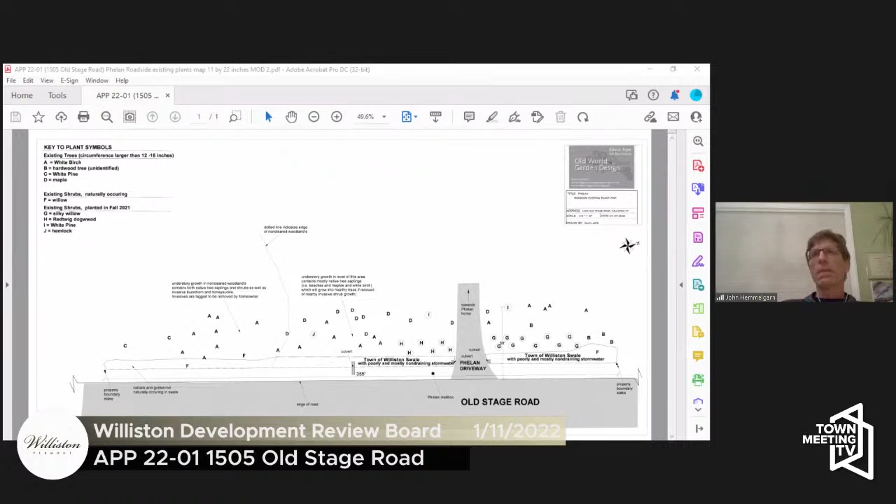And so the meeting with staff, so who is that? Well, given the fact that Matt originally ruled and the DRB overturned his opinion, I would recommend that you go to Emily. I think it needs to be- oh, I saw Melinda raise her hand. Oh, okay, no problem. Melinda, you're the person. Thank you for that, John. So go see Melinda, set up a time, have a conversation about what the regulations declare for a buffer.

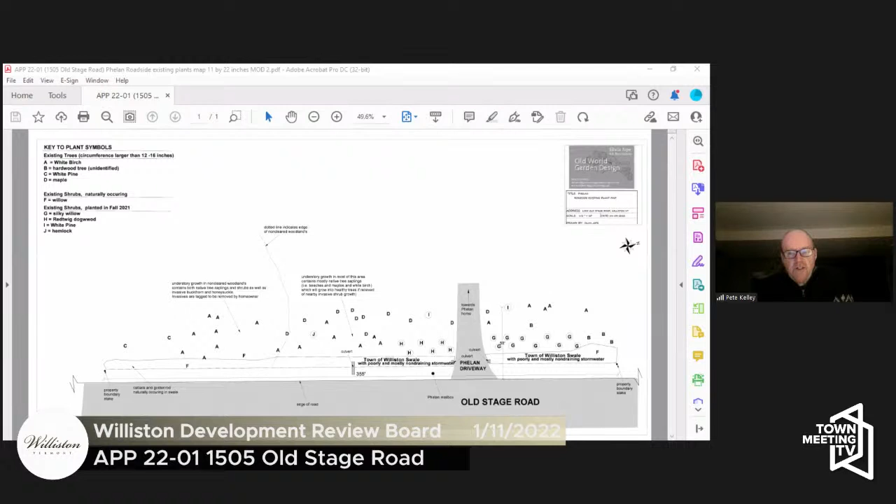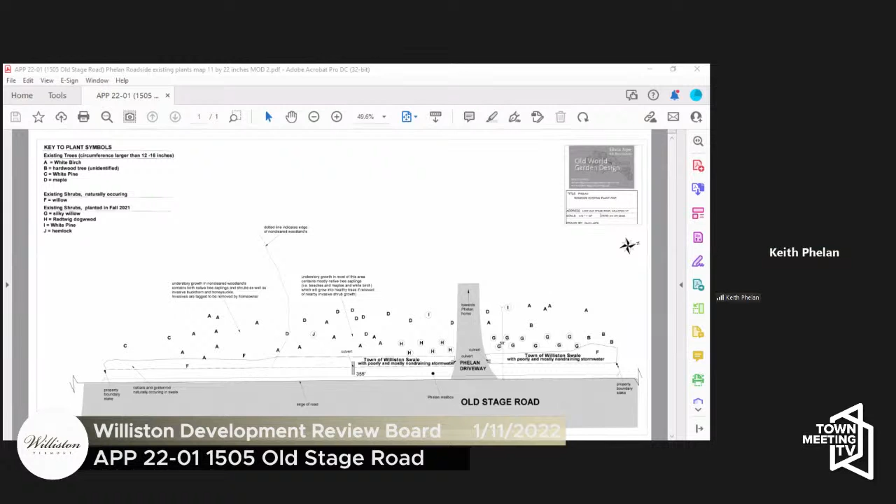I would recommend that you do it with Melinda, have that conversation, engage in that conversation with her. I think it will be fruitful. Okay, all right, sounds good, thank you. And thank you for accelerating me up to the front, appreciate it. Oh, not a worry. Thank you.

Okay, going back to the agenda.

Two items in the public hearing portion: DP 22-04 Chittenden Solid Waste District and DP 21-20 Taft Corners Associates.

First up is DP 22-04. Who is here representing that application?

Josh Tyler, Chittenden Solid Waste District, Director of Operations. I'm joined by Tim Shea of the Chittenden Solid Waste District, Associate Director of Operations, and Doug Goulette, our Consulting Engineer.

Great, welcome all. As disclosure, Doug Goulette and I are neighbors in the same Williston subdivision. I do not see that as a conflict of interest.

Okay, first up is staff. Melinda: the Chittenden Solid Waste District would request pre-application review of a proposed 10,000 square foot administrative building with parking and other appurtenances located at 694 Redmond Road in the Industrial Zoning District East. The new administrative building would replace the CSWD's existing facility located at 1021 Redmond Road.

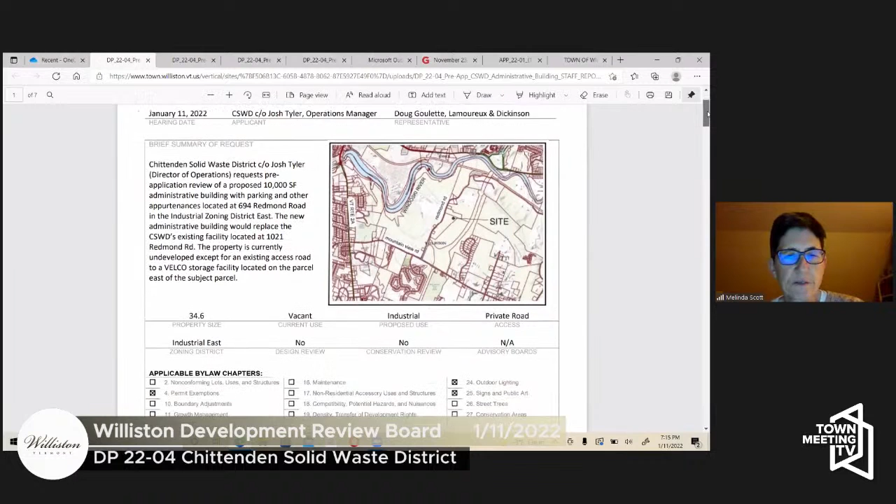Staff is recommending the DRB recommend the proposed project proceed to discretionary permit with recommendations as drafted. This is the first time the DRB is reviewing this request. In 2001, the DRB approved SUB 0110, which created the subject parcel. Advisory boards did not review the proposed project.

The Public Works Department reviewed the proposed project and... Melinda, can I interrupt you for one second? Just as a point of clarity, I apologize. You said that this hearing was a discretionary permit. It's a pre-app, isn't it? It is a pre-application, sorry, yes. Okay, yeah, all right. Thank you, I apologize. No, just want to make sure it's clear.

Okay, so the Public Works Department did review the site plan and provided comments in a memo dated December 17th, 2021. Their comments are included. We received one comment letter at the time of the mail out from Geraldine and Leyland Carpenter, and you also received that comment letter with your packet.

So the dimensional standards in the Industrial Zoning District East: the maximum height is 36 feet. Minimum setback from any road is 50 feet. The rear and side property line setbacks are controlled by the landscaping requirements of Chapter 23. There is a requirement that the lot have at least 40 feet of road frontage on an existing public or private road. Compliance with height and setback standards are expected.

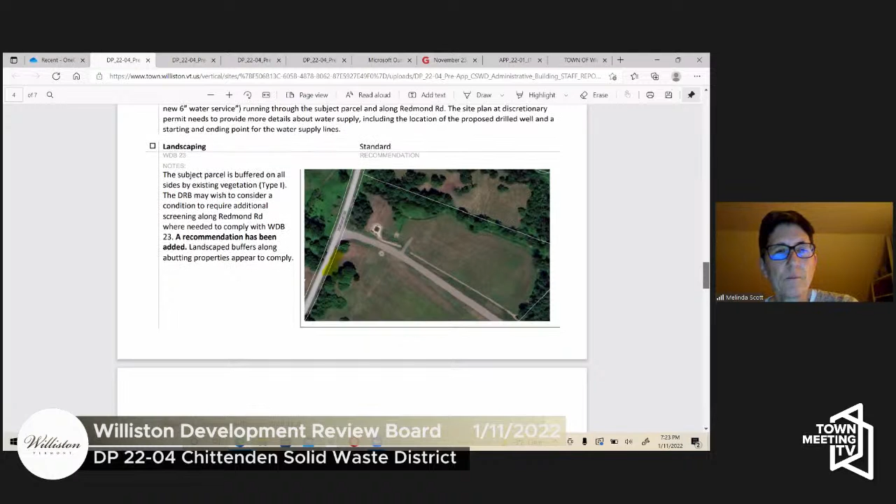Based on some communication via email that we've had with the Department of Public Works, it's my understanding that CSWD is applying to have water service extended to that parcel and is working with the Department of Public Works on that. A state permit will be required for the extension of any public water supply, but it's not really applicable to the Williston Development Bylaw.

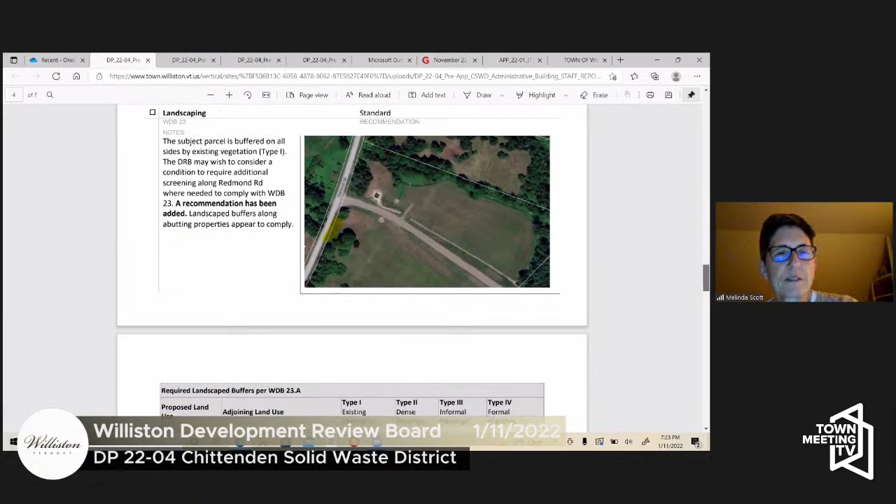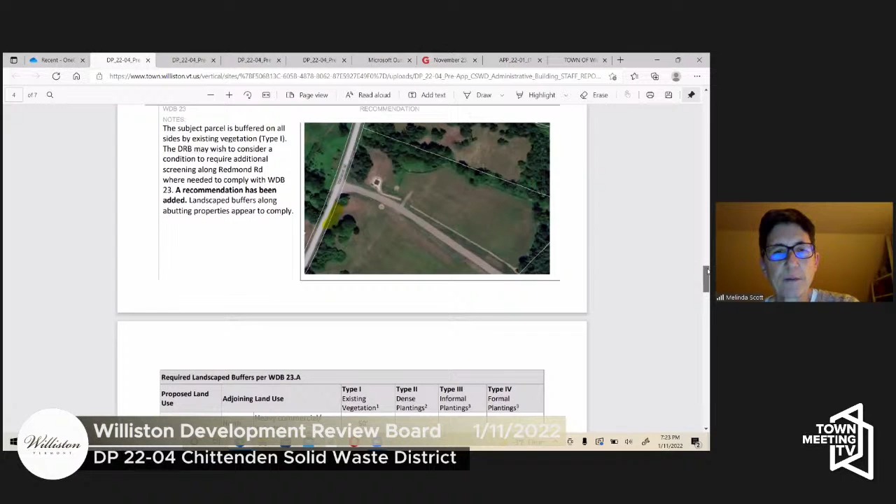For landscaping, the subject parcel is buffered on all sides by existing vegetation, a type 1 buffer. The DRB may wish to consider a condition to require additional screening along Redmond Road where needed to comply with WDB 23. A recommendation has been added. The landscape buffers along the abutting properties appear to comply.

For street trees, WDB 26 requires street trees for many development or redevelopment projects. Street tree plantings can be considered a type 4 buffer and therefore fulfill a portion of a development's overall landscaping requirements. Because the frontage along Redmond Road is buffered by existing vegetation, staff doesn't think that requiring street trees is necessary or appropriate.

There are no mapped watershed protection buffers on the subject parcel except for a small Class 2 wetland on the northwest corner of the property, which will be protected with a 50-foot buffer as required by state law and the Williston bylaw.

WDB 29.961 requires all watershed protection buffers to remain unmown and in natural native vegetation. To ensure the watershed protection buffer is not disturbed, WDB 29.97 requires the buffer to be marked on the final plans and demarcated on the ground by plantings, a fence, or preferably a line of boulders.

The site plan shows an existing stormwater feature east of Redmond Road and north of the access drive that receives runoff from a swale running alongside and parallel to the access drive. The site plan also shows a possible location of stormwater practice for runoff from new impervious surfaces.

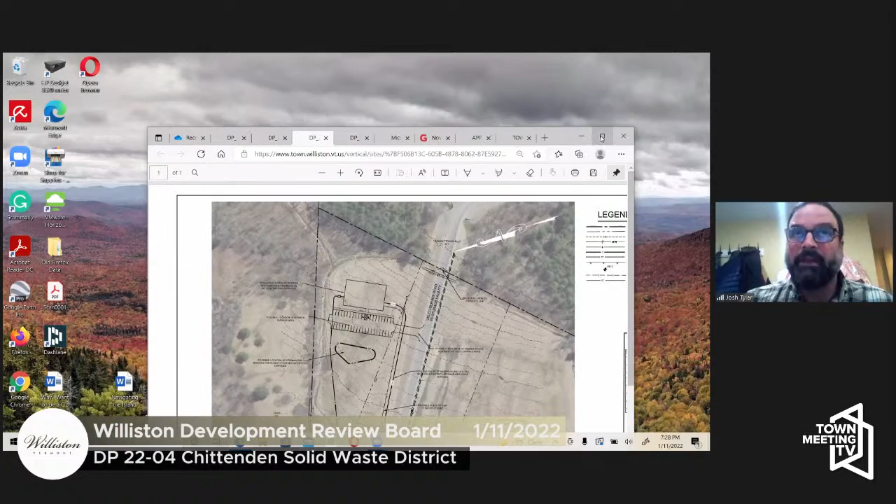I'm curious how you came up with 41 spaces, or what a typical day would look like for this building. It ranges. We do hold safety committee meetings, an internal committee, that bring upwards of 12 extra people onto the site. We roughly have 25 full-time employees at our existing facility, I think it's 24 at this point, with three positions to fill. We also hold workshops sometimes.

The idea with those would most likely be after hours, but there are times when we have meetings and bring people in. We are considering using this as our exec board meeting space as well. We do use the town of Williston for our full board. I don't think we're going to get enough room into it to go away from that, but we'll see, kind of when our architects roll their sleeves up.

But yeah, that was the idea, just not to undersupply the amount of parking. We've hit as much as 30 to 35 people, and we've had to park over at our compost facility in the past to do that. So that was kind of, we tried to get as many in as we could. Thank you. Yep.

David, it was basically an oversight that I failed to look at the new regulations and the new parking table, so I would have maybe commented on that before showing the 41. But as Josh said, we definitely will provide some EV parking and carpool parking to get the numbers down a bit to be within the range of the current bylaw.

Okay, having said that, now that the plan's up, I'll give a quick overview. What's shown for the building is 10,000 square feet. Once an architect gets more involved, I'm sure that footprint will change somewhat, but that's sort of the general placeholder on the general location of the site.

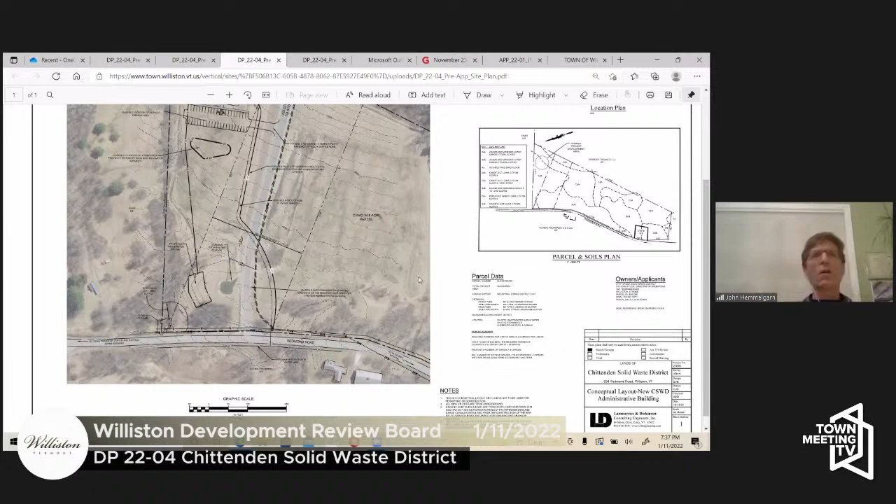Okay, so when you say there's an existing buffer, you're talking about what's all along the road, along Redmond Road, not along the Velco easement drive, as I assume that's a driveway that's running along inside your property. Is that right? So there's no screening required there. Right. The screening or the buffers only pertain to the perimeter property lines, which are fairly heavily vegetated right now. Right, and I think we can see that.

I mean, the one exception on the what is that? The north, on the left there. Is that actually, that says CSWD, doesn't it? Right there, as the neighboring property owner. That's correct. Okay, but it's a different parcel owned by your client. Correct. Okay, Melinda, does that require buffering between two parcels owned by the same entity? So our bylaw treats abutting parcels, even if they're physically separated by boundary, but if they're owned by the same entity, they're treated as one parcel. Okay, so that entire north parcel is essentially the buffer.

So, okay, all right, that helps a lot in understanding the buffering conversation. And I guess, Simon, maybe you can circle and make sure I'm understanding the buffer along the road. Is that copse of trees there, just or would that be west of the septic field? Yeah, right there. Yeah, it's a pretty dense thicket.

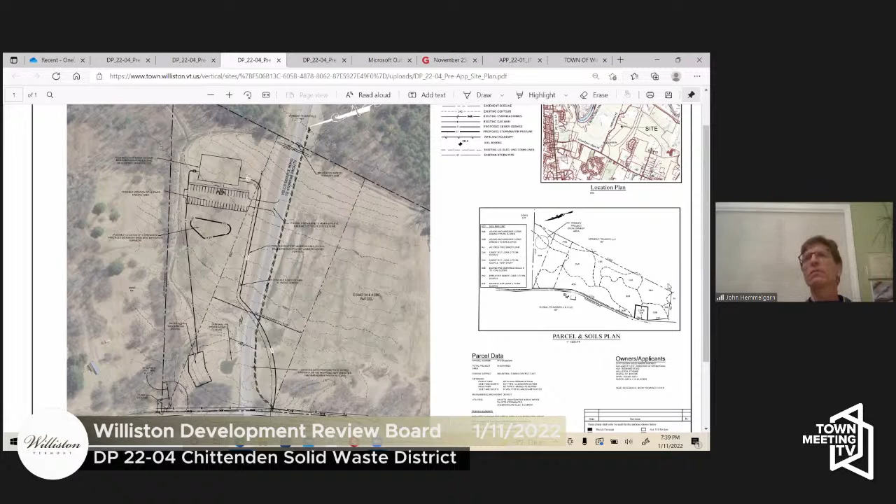It seems, just commenting out loud to the rest of the board, it seems crazy to tear those down to put in street trees along a road that doesn't really fit with the idea of street trees very well. I think I would chime in here and argue that this is set so far back from the road with lots of perimeter buffering that I don't think there's a heck of a lot needed here. To me, at this point, it's an esoteric discussion.

Right, exactly. Yeah, and I agree with John's point, is that for the character of the area, street trees would look odd. They would look pretty cool if you did them all along the Velco driveway, but that's not part of this conversation. Yeah, that actually could look cool, but we're not into cool here. But that's not something it's within our purview here to ask for either.

Pete, that's all. Those are all the comments I had today. Okay, any other members of the DRB, comments please?

Yeah, one comment. I'd like you to consider looking at the porous parking. We need one of you guys to step up and actually build some of that because I believe in it.

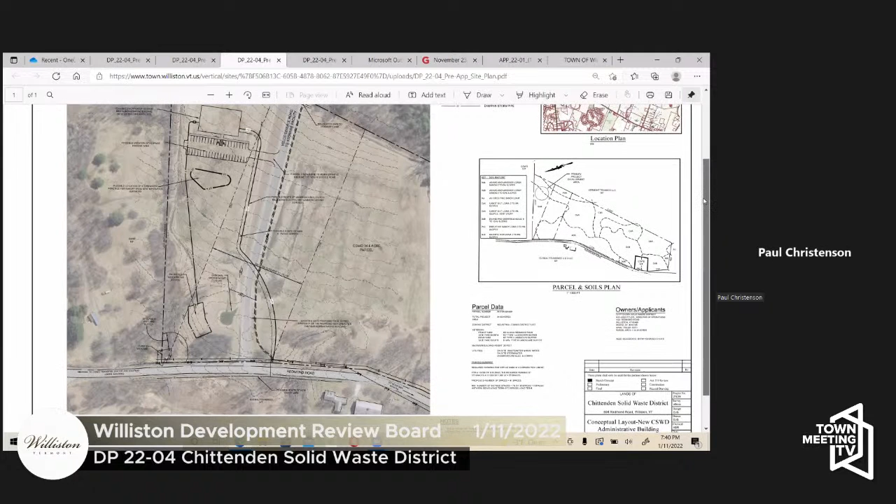Well, how about this, we'll take a look. I'm a believer in it as well, so we'll see what it looks like. Doug and I will put our heads together. How's that sound? Like I said, don't just immediately pull back from 41. We could have 41, just make sure some of it's porous because I think it'd be a nice demonstration project so other companies could say, oh yeah, you can actually do it.

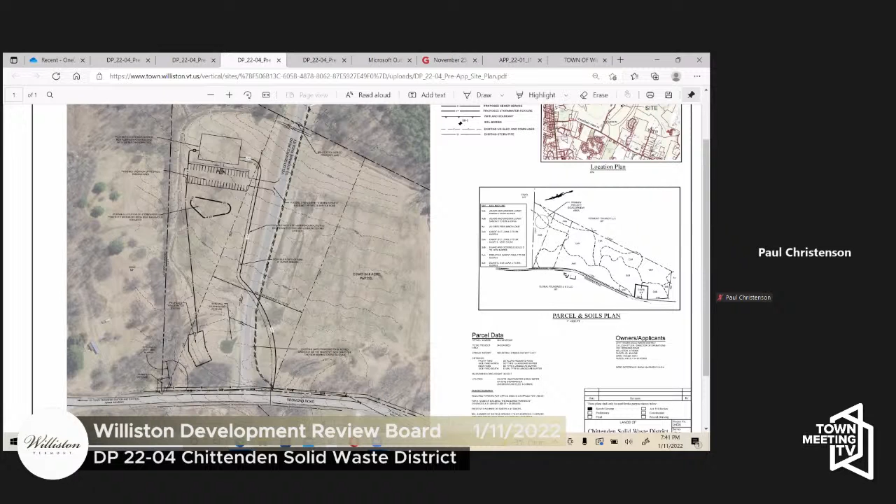And we are in control of our own sanding and salting, so we could regulate that pretty well.

I just had a quick question on the site, not necessarily the site plan itself, but just looking at the aerial, I guess just east of that existing teardrop stormwater feature, it looks like there's a driveway that's perpendicular to the road where the stone ditch kind of goes underneath?

Yes, David, it's a little gravel service road, probably built when they built the stormwater pond. Okay, so that was just to get access across that ditch. Yep, it doesn't go anywhere. That's where I always just park when I go to the site. It's big enough for a single vehicle to pull out and park. Okay, I couldn't quite tell from the ortho what it was.

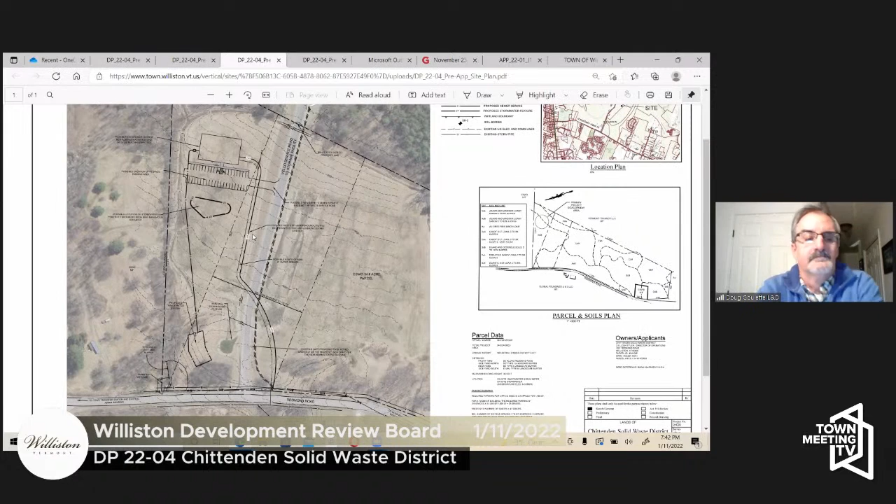Any other questions? Okay, members of the public, any questions? Anybody out there that has a question for the DRB, questions pertaining to this application, please raise your Zoom hand.

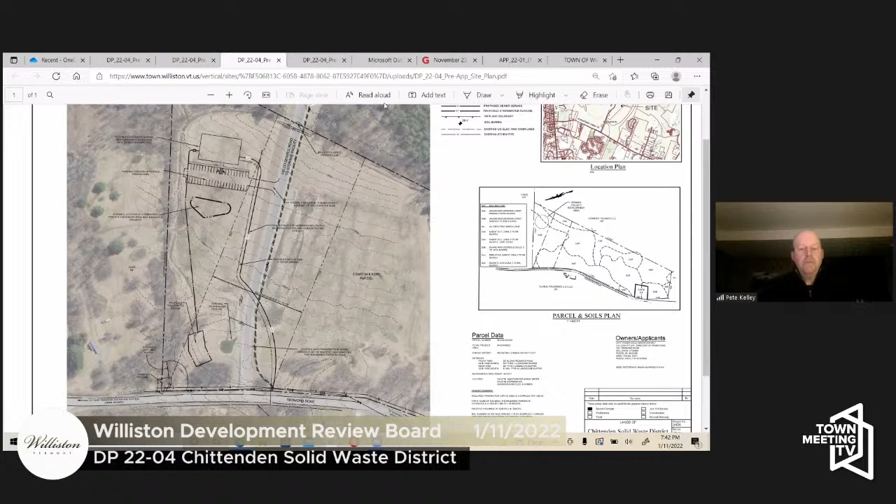I'm not seeing any raised hands on Zoom, so I don't think anyone's got any questions. Okay, thank you, Simon. Okay, last chance for questions from the DRB.

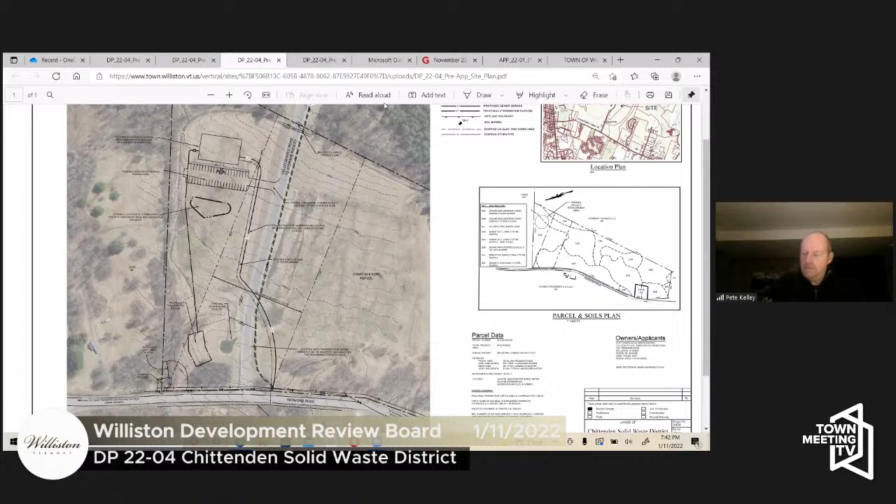Any wrap-up comments by the applicant? Thank you for having us and thank you for your time. All right, thank you.

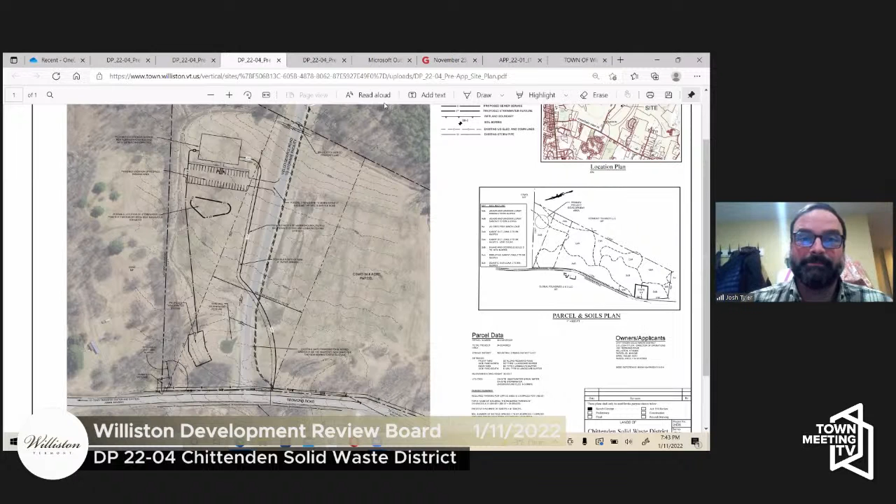Okay, next up is DP 21-20, Taft Corners Associates, care of JL Davis.

I'm going to recuse myself from this hearing. The reason is my employer, DEW, does work with JL Davis, and so I have an inherent conflict of interest on this application. So I'm going to turn it over to Mr. Hemmelgarn to head this up, and I will be a member of the audience for this application.

Thank you, Pete. So at this time, I would ask, Pete, did you actually open that hearing, or is that something I should do here first? All right, let's just open this hearing at 7:44, whether we need to or not.

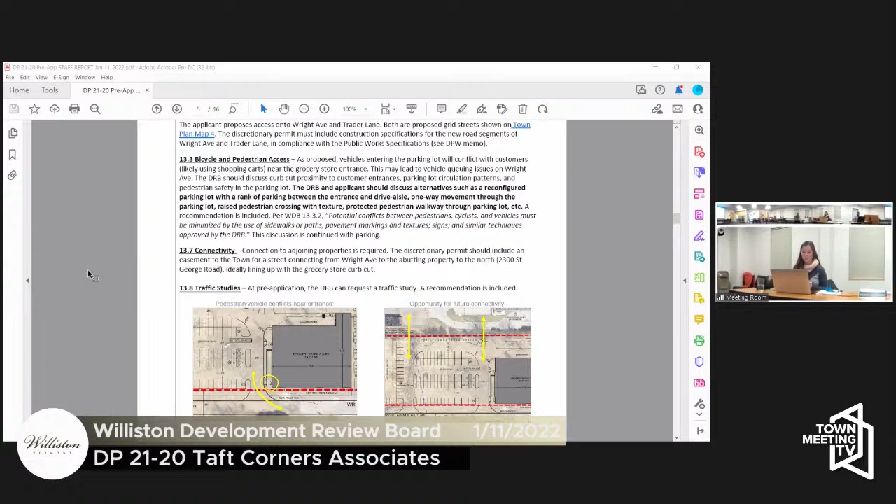The DRB and applicant should discuss alternatives such as a reconfigured parking lot with a rank of parking between the entrance and drive aisle, one-way movement through the parking lot, raised pedestrian crossing with texture, or a protected pedestrian walkway through the parking lot, basically to reduce that conflict between customers with shopping carts entering and exiting the store and vehicles turning in and out of the parking lot.

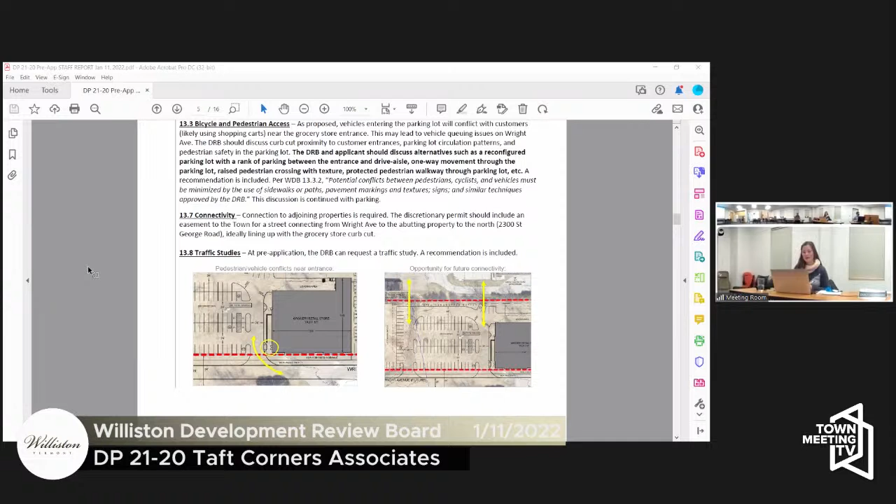Similarly, there's a recommendation for connectivity with abutting properties, and also a recommendation that a traffic study be provided at discretionary permit.

Parking and loading at discretionary permit must include vehicular and bicycle parking in compliance with Chapter 14. This must include a shared parking study. The intent of this bylaw is to reduce surface parking to the maximum extent possible, and there's possibility for a share between a residential use and a grocery store.

In terms of parking lot design, the discretionary permit must include a cohesive parking lot shared between the grocery store and future building. As highlighted here, there's an inefficient use of space and an unusual circulation pattern between the grocery store lot and the future parking lot.

Reiterating the discussion above, the parking lot design must protect pedestrians moving through the parking area, especially near the main entrance. What follows is a summary of the parking requirements that would need to be finalized at discretionary permit.

Under maintenance, specific recommendations are included: trash and recycling receptacles along sidewalks near street corners, identifying snow storage or removal plans, and a plan for solid waste management. Grocery store dumpsters should be hidden from public view, and storage of pallets, boxes, compost, or other unusual or bulky waste items associated with the grocery store should be screened in accordance with the bylaw.

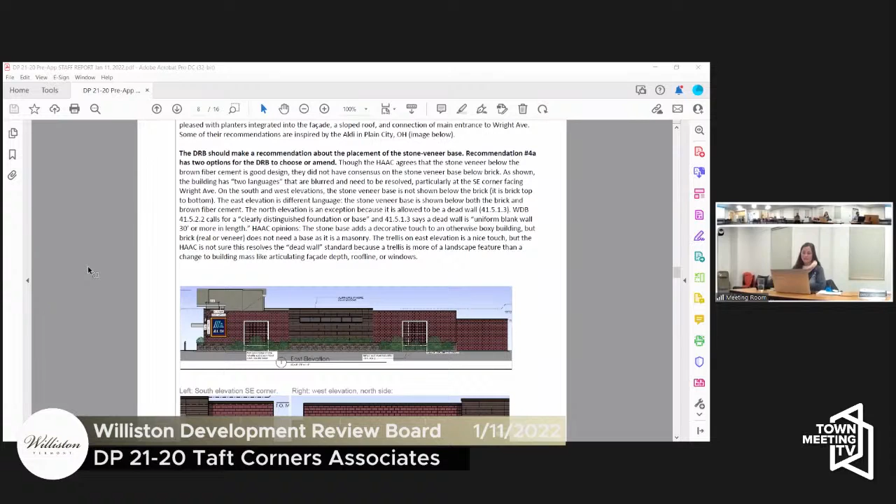Some of their recommendations are inspired by the Aldi in Plain City, shown below. The HAAC discussed but could not agree on the placement of the stone veneer base, which differs on the east facade from the west and south facades. There are two options in recommendation 4A for the DRB to review and choose.

This is the photo of the Aldi in Plain City, which has a more prominent entryway that utilizes art. However, the HAAC does discourage the fake windows shown above the canopy.

Discretionary permit must include a landscaping plan. The landscaping requirements will differ for the grocery store building, a retail or service commercial use, and the future mixed-use building including residential. Basically, the north property line can have different buffers in those areas. Along the south and west, street trees will be required on those frontages.

The recommendations for street trees, watershed health, outdoor lighting, and signs and public art are all standard recommendations. I note that the sign area would need to come into compliance with the bylaw, reducing wall signage area.

Lastly, impact fees. Construction of grid streets can be considered an in-kind contribution and credited towards the impact fee liability. This would need to be shown at discretionary permit with a vehicle trip summary and cost estimate for road construction. What follows is the list of recommendations as drafted by the HAAC and staff.

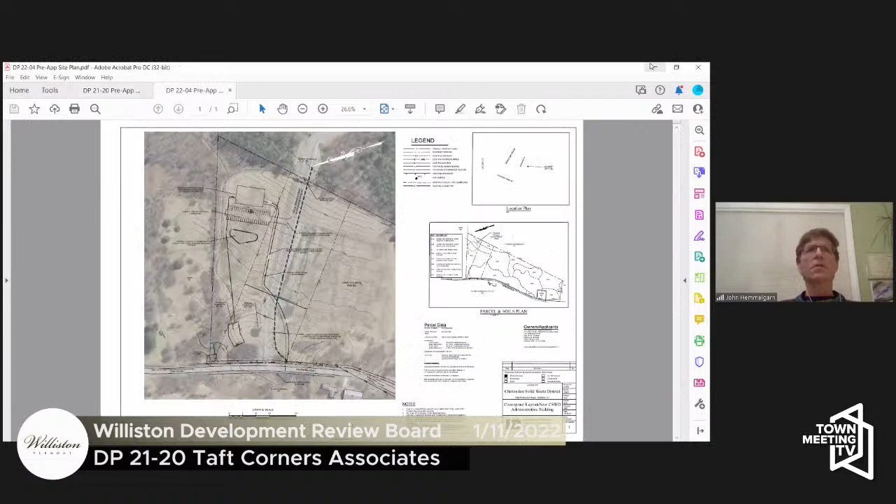Okay, so the grocery store is proposed at the easterly end of the site. We'll confirm this before the discretionary permit, but I believe the bank is on a leased portion of this lot, and the future building, the grocery store, and the bank are all on the same parcel, with a lease area defined for the bank.

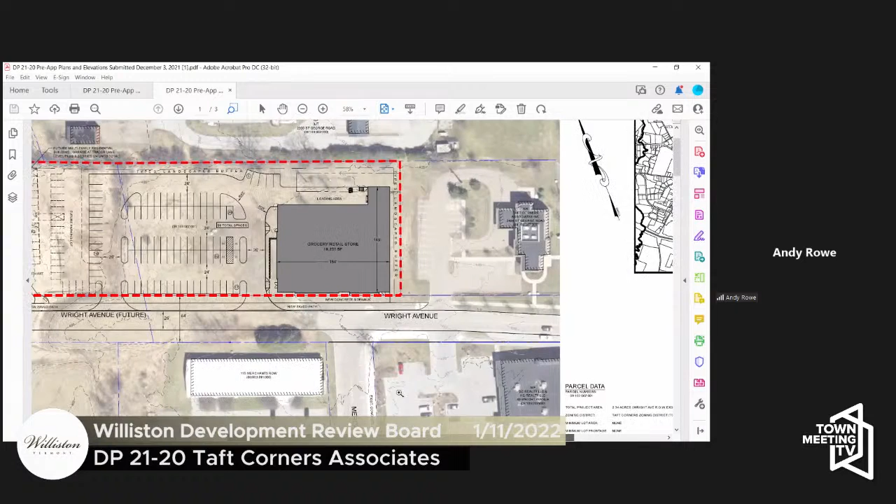So the grocery store is on the easterly portion, the future building is on the westerly portion, largely fronting on Trader Lane. There would be two curb cuts along Wright Avenue, one close to the front door of the grocery store. Again, there's access into the grocery store at the southwest corner, to the west facing the parking lot, and also to the south facing Wright Avenue.

On the east side of the building is the loading area, with that little appendage being the loading dock, a single loading dock, and then trash. We'll also look at the need for outside storage as suggested by staff, for bulky items, pallets, that sort of thing. The two curb cuts are intended to allow circulation for deliveries through the site, coming in past the front of the building, back into the loading area, and then continuing west to exit back out onto Wright Avenue.

Initially, there would be 98 spaces constructed for the grocery store. The area shown to the west would be additional parking for the multifamily. It's somewhat inefficient in that there's an aisle with only a bay of parking on one side, but we didn't want to have an additional curb cut onto Wright Avenue.

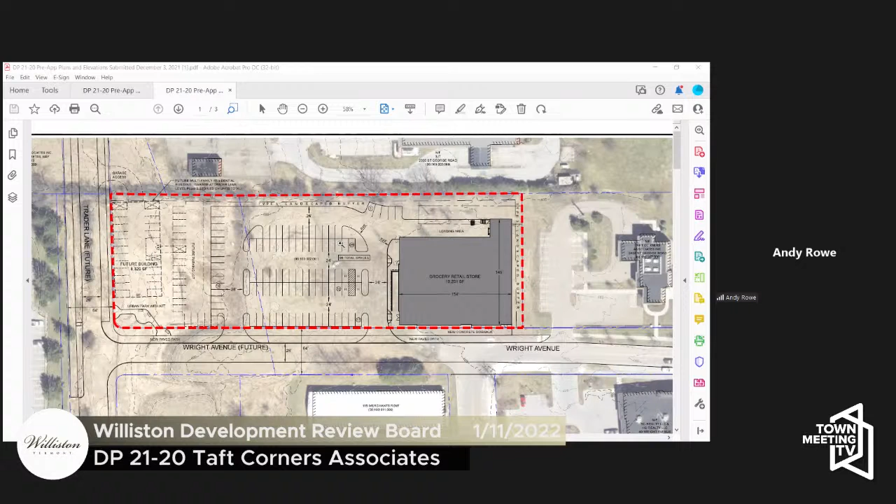Well, I'm just wondering what if the market changes significantly in that period of time, and now there's no ability or desire to actually construct that. That kind of complicates the permit for the grocery store, which is now complete and people are shopping there every week. It's kind of hard to revoke that permit, and yet part of the approval of this project is contingent on construction of that apartment building. So I'm a little concerned about how we can get the assurances we need to make that happen.

John, I'm not so sure I agree with you on that. I think this lot allows for a commercial building and an apartment building with requirements for a park and view shed and what have you, but you don't have to build it all at once. And I don't think there's any requirement to put an apartment building on here at all—it's simply allowed for it. It is allowed in the bylaws, and there's enough room for it.

If you wanted to just erase that from the area and they came back at a later date to put an apartment building here, you could do it that way, but that's not what they've done. I don't think there's a requirement that this be all built at once, nor do I think the staff report even says that.

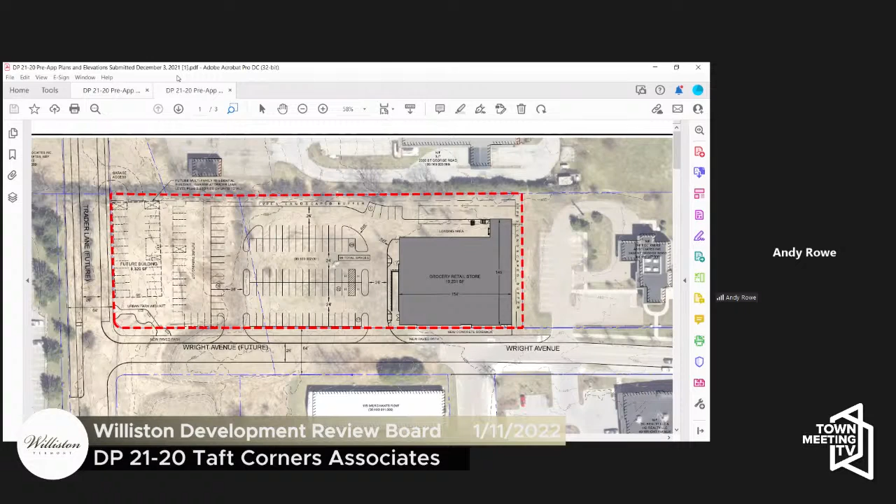I guess the other thing I might note on the future building is, I think it's a requirement to meet the 5 of 9 that a multi-story building be built there and that it be multiple uses. It couldn't be another grocery store, but office is a really great market now - it could be office, it could be retail, it could be a number of different uses with residential on the upper floors, but it wouldn't necessarily have to be all residential. Not that that's the applicant's intention, but I think in order to meet the 5 of 9, it's got to be multiple stories.

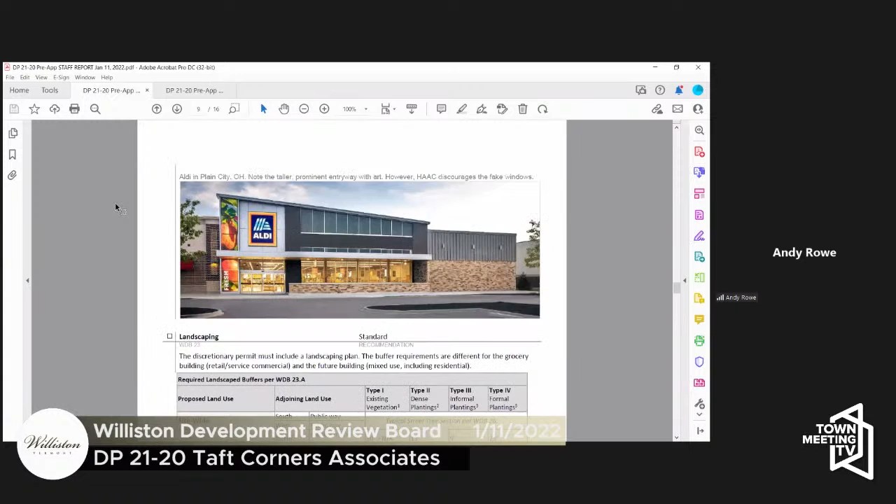It's got to have that certain footprint in order to meet the multiple story criteria, and it needs to have multiple uses. Well, I don't think anybody wants a third grocery store in the neighborhood anyways.

So yeah, I think that's an excellent point you make, that it wouldn't necessarily have to be a residential use to meet the 5 of 9. I guess part of my question might be back towards staff here.

In terms of what is the time expectation to meet or develop the 5 of 9 elements on any given development. Obviously on Finney Crossing it's taken quite a long time to do that, but that's a huge development, a much larger parcel than this.

The bylaw itself is silent on the timing that's required for the 5 of 9 criteria to be met. It's kind of a reasonableness factor.

What my threshold was when thinking about writing recommendation number 1A is that the discretionary permit, if the grocery store is to happen in the first phase, needs to show us with some certainty that the rest of the site can support the building as proposed. So show us a cohesive parking and utility plan.

One of the 5 of 9 criteria is multiple stories, 60% of the floor area. So if the grocery store is 19,000 and some odd square feet, the footprint of that future building needs to be a certain size, and it needs to be 3 stories to meet that threshold.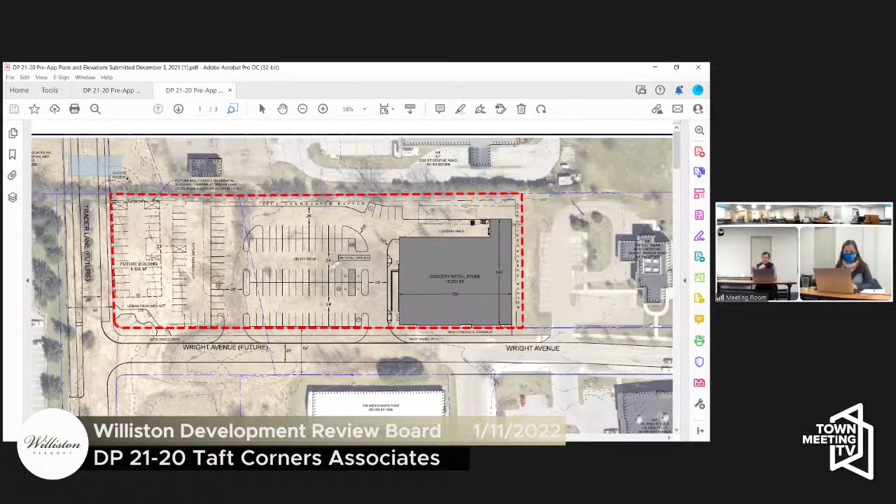Right, so as it's shown on the plan right now, there's a part of the parking for the proposed residential building that can only be accessed from Trader Lane.

Could there be some other design of a similar building that could take all of its needed access from Wright Avenue? Probably, and Emily's right.

With a 40 unit limit, under current bylaw, this 2.34 acre lot would serve up to 17 and a half dwelling unit equivalents. So it's unlikely that the applicants would go over the 40 units or fit anywhere near that number in a building of this size.

So there's probably a way that this site could be developed with a building more or less in that location without constructing any of Trader Lane.

But you'd have to see that at discretionary permit. You're either going to get a discretionary permit that proposes to build a piece of Trader Lane in order to build this residential building, or that doesn't, or one that offers the options. The bylaw requirement is for safe access.

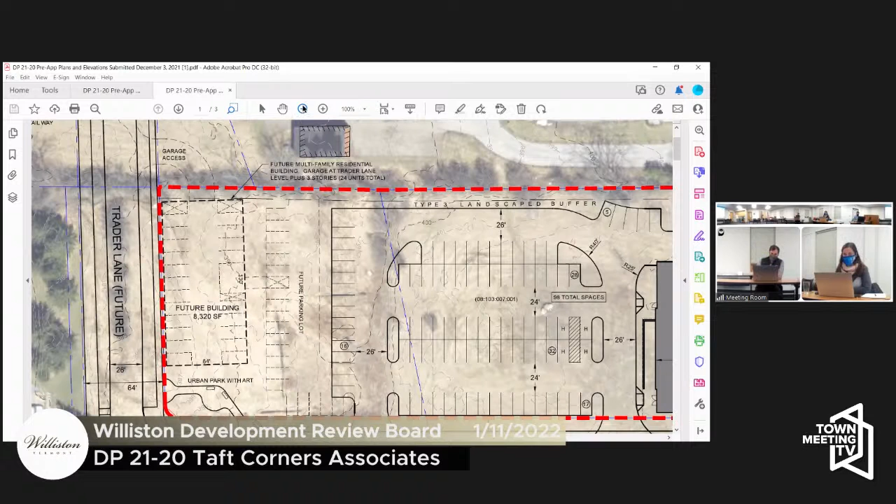Okay. Right, so I guess, Paul, I appreciate that question, but more generically, what if something else happens and that makes it difficult or not viable to complete the development on the site? I guess that's probably a question that can be asked of a lot of different developments.

But I guess I just looked at the DP to have some assurance that this project is moving forward, and that the developer is moving deliberately towards conclusion of all the proposed items on the site.

The other issue mentioned here at one point by Emily was the concept that the Williston zoning rules are about to change. I'm not sure how this future building, whether it's even going to need to comply with the current WDB, or is it going to need to comply with the potential form-based code that's coming up? And Matt, I'm not sure even how that plays into this conversation.

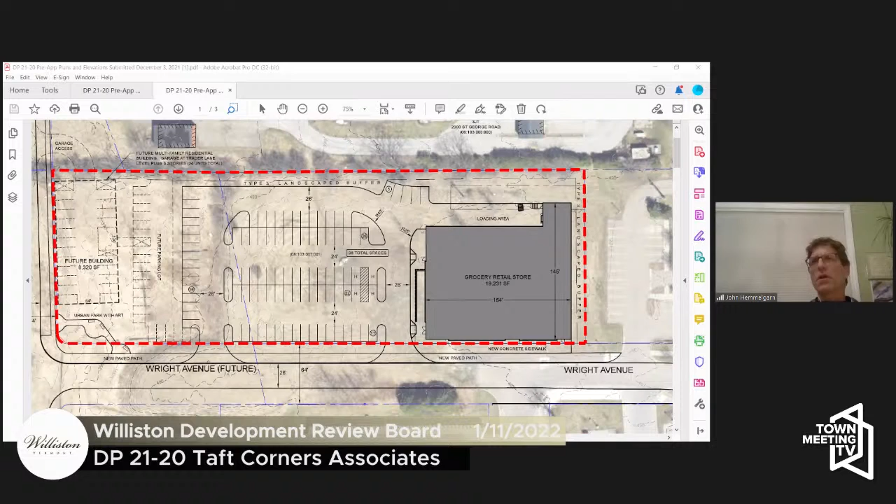So the point in our bylaw at which projects vest in the version of the bylaw that will be applied to them going forward is when a complete application for a discretionary permit is filed. So to the extent that this future building is filed for as part of a complete application for a discretionary permit, i.e. if it's filed for a discretionary permit as part of the grocery store, it's vested in today's version of the bylaw. Does that make sense? Or is there something I could clarify beyond that?

Well, yeah, I mean, would that mean that there's a full design for this building that's submitted at the time that the discretionary permit is put in front of us for the grocery store? And if that's the case, how can you do that if it has to go through growth management first?

Well, that's a fair question. Typically, we don't think of a discretionary permit application as being ripe for review if it's a residential project, unless the project has received allocation under the growth management system, which, as you pointed out earlier in the hearing, happens once a year. So in this case, you have a proposed grocery store that relies on a residential building to meet 2 of the 5 of 9 criteria for the grocery store's approval.

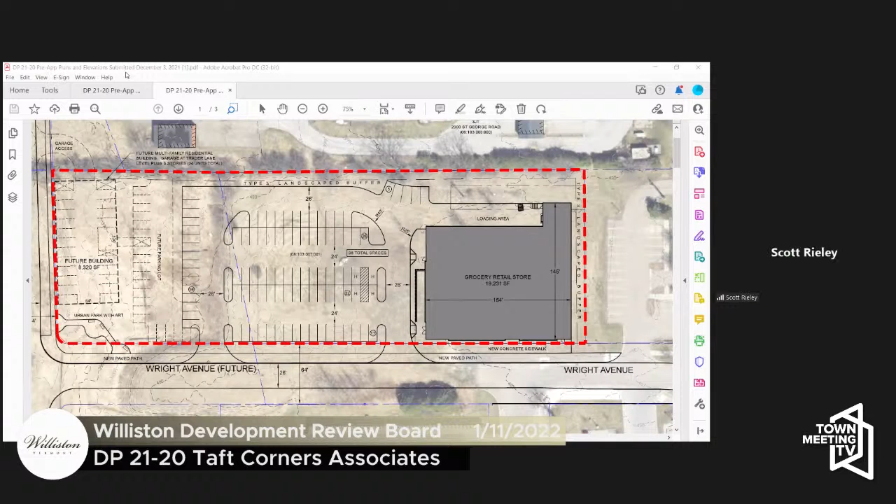Anything else, Scott? Do you want to follow up there? No, I'm fine for the time being. Okay, shoot, because I'm having a hard time kind of putting this into a coherent format of questions.

So Matt, is it even possible, are we allowed to review something, a residential component of a project like this before it has growth management allocation?

Well, I will draw a parallel for you and maybe you can make your own judgment on it. The DRB does review overall subdivision layouts for subdivisions that only have partial allocation. So when you looked at, for example, phase 1 of the Northridge subdivision, there was allocation to build phase 1, and there was an overall subdivision plan and plat showing street layouts, infrastructure, and lot layouts that included phase 2, for which there was not yet any allocation. Phase 2 was not a complete blank on the site plan. It was designed, and we certainly looked at it and made sure that it was in compliance with the bylaw. So in a sense, yes.

I'll say I spent a lot of time thinking about the complexities and timing related to this project and thinking about all the things that would make life easier. Of course, it would make life easier if the 5 of 9 were simply met by the grocery store as a standalone project, because then we wouldn't worry about what was going to happen on the rest of the site. And as Andy mentioned earlier, it actually makes life a little easier if that additional building was an office building, because then it's not bogged down by the timing element of growth management.

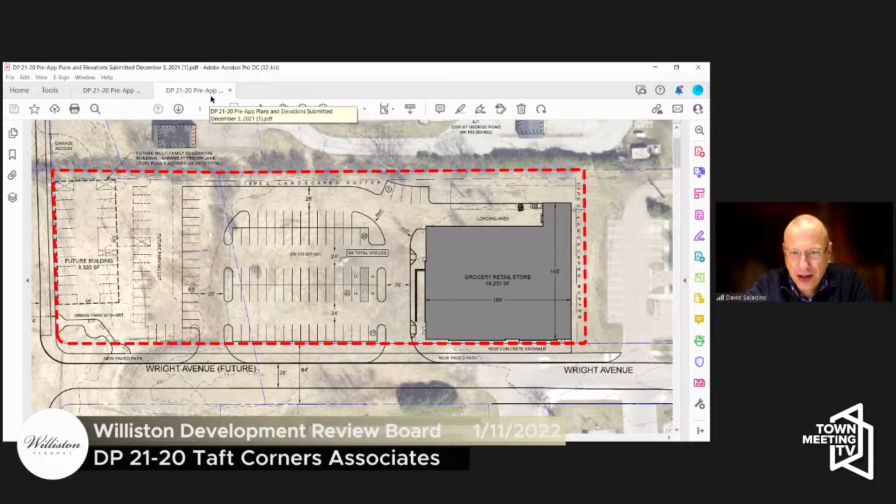Just south of the grocery store, there's a note of a new sidewalk and paved path. Is that intentional to have both right next to each other? Yeah, the intent is to carry the paved path that exists along Wright Avenue, carrying that hardscape from the paved path up to the edge of the grocery store, not only up to the planter proposed along that elevation but also all the way down to the entry at the southwest corner. Are you picturing asphalt and then concrete, two different material types? Yes.

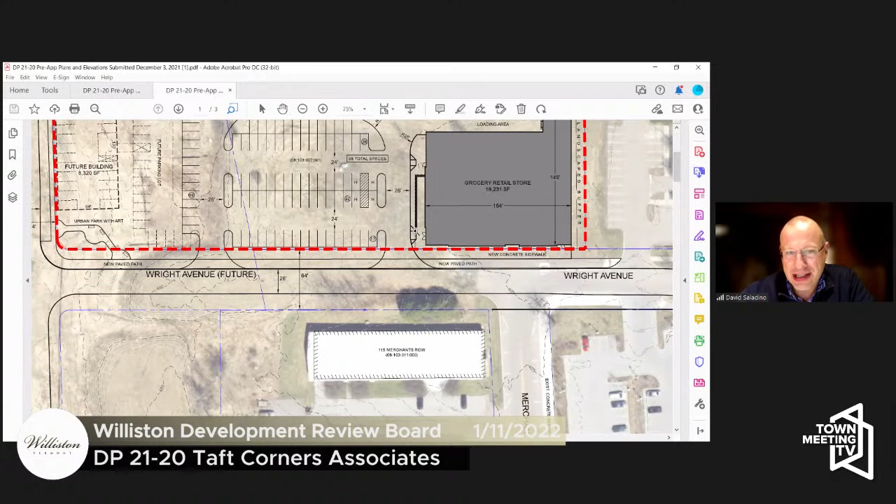In the same area, regarding Emily's comment about that door, the entrance coming right out around that radius with cars coming in, I'd agree that's not ideal from a safety perspective. Curious if you've thought of alternatives. One alternative I thought of: is it possible to shift the store to the north? The loading area could shift up a little, you'd lose about 5 parking spaces, but can this be shifted north, or does the building have to be right along the frontage or property line?

I'll let staff answer how far back it could be. There is a utility line along the north side of the building that would need to be relocated, so there's a bit of a pinch point there. The overhead utility line would need to be relocated with the building's current configuration, pushed even further to the north. It would be a limitation on how far the building could move.

Our bylaw does require that new buildings come to the sidewalk, and parking and outdoor sales move to the side or rear. So they are compliant with having their entrance and primary facade along Wright Avenue.

It's an interesting point to move the building north. Could you have planters or landscape designs, something that would qualify as part of the building but allow it to be slid further north? Maybe a patio or some architectural component like a wing wall, something that would be defined as part of the building. Andy, there looks like there's room to slide it to the north, right?

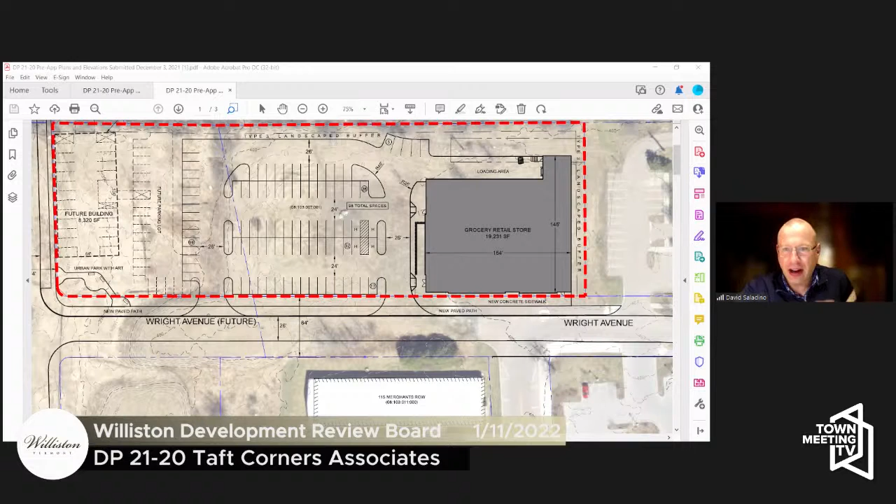Yes, there are some old lot lines in there. The future building is shown on an existing Taft Corners Commercial Park lot. The grocery store is on the lot that the Northfield Savings Bank is part of.

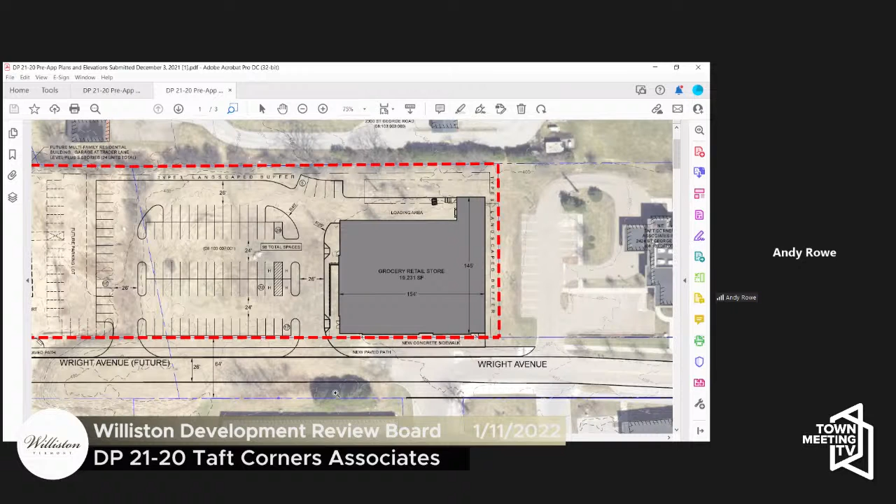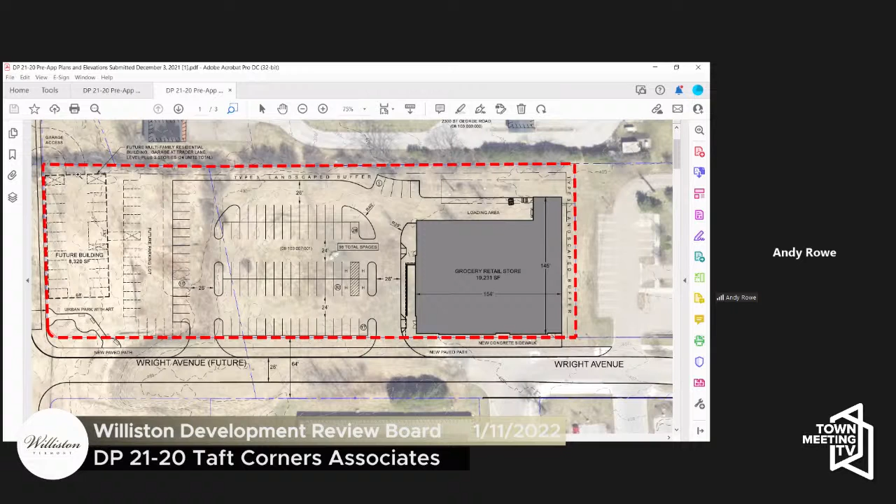So would you be merging these lots as part of the application? I think there'd be some merger, there'd be a lot of things going on because the lots would merge. You'd also be creating the right of way for Wright Avenue and Trader Lane. Right. There may be either a boundary line adjustment or an easement arrangement for the access into the garage on the future building to the north. There would certainly be some subdivision elements here, but I think it would be a number of things happening.

Got it. Related to the boundary line adjustment, the staff note said that garage access would need a boundary line adjustment to bring that access onto this lot. I think you mentioned, Andy, that you were just thinking of an easement across that parcel. Is it a requirement to have that access be entirely on this parcel, or can there just be an access easement across that property?

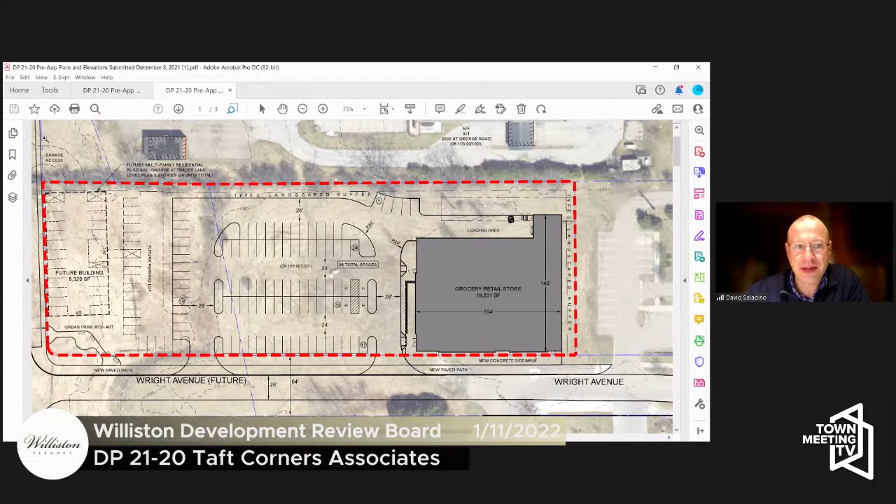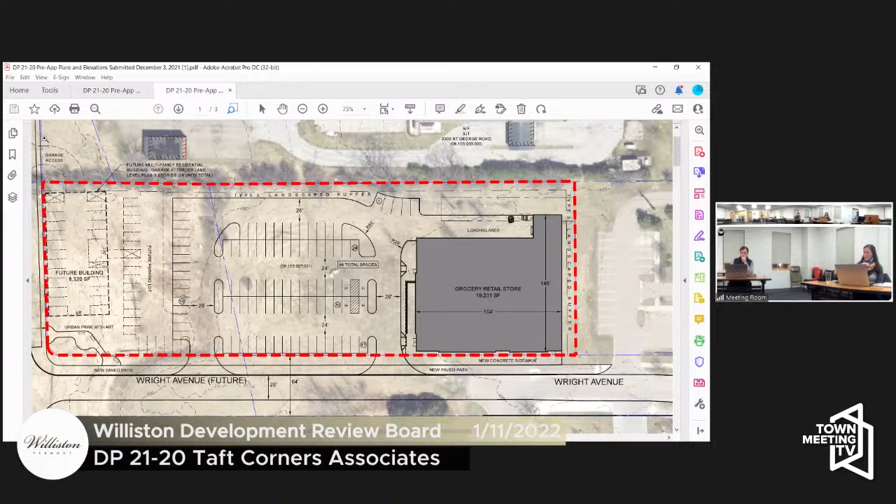I'll let Emily answer that. I would have to look into the bylaw a little bit more. I think typically in projects of this size and scale, we like to see everything contained within the subject property, but an access easement might meet the bylaw requirement for safe legal access. That can be worked out at the discretionary permit stage.

David, that triangular shaped piece to the north is kind of an orphaned lot from the Trader Lane extension. So that could easily be merged into this overall site. Got it, it's not tied to the bank lot. Yeah, I see, no, it's not. Okay.

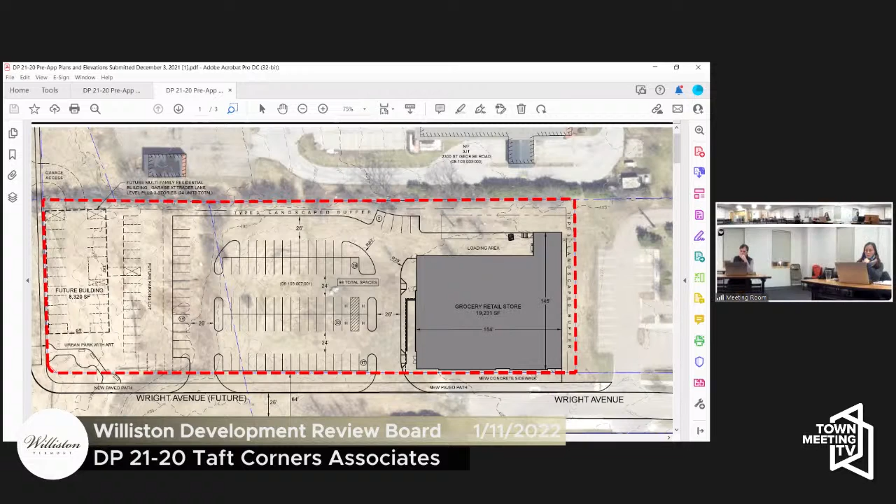Last question, in terms of the requirement to have that connection to the north, is there any wiggle room, or is it a must that there shall be a connection to the parcel to the north no matter what? There's some wiggle room. What the access chapter says is where there are no physical barriers, providing that point for future connection, whether it be constructed or the offer to the town to be able to connect through. Okay, where there's no physical barriers. Okay.

Question, David, I'm glad David brought that up. They'd prefer not to create a shortcut, if you will, and have a traffic issue through their parking lot. Because the dealer property is eventually going to connect to Trader Lane, they'll have another means of egress from their land. They wouldn't necessarily need a third egress across this lot, would they?

I guess that's a question for Emily. Right, what the current bylaw says now is that there be future access connected to future properties. On my staff report, I show 2 options. I don't think it has to be 2, I think 1 could probably meet the intent of the bylaw.

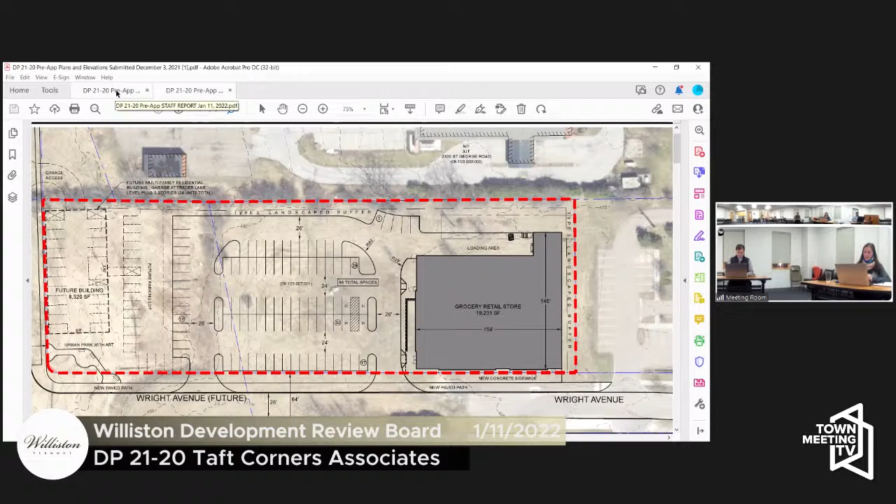For access, you're saying 1, Emily, but Jeff is asking if 0 is okay, right? I don't know if 0 would be okay. Let me pull up chapter 13 for the quotation.

So what chapter 13 says is: development should have safe functional connections with adjoining developments for vehicles, bicyclists, and pedestrians. Interconnected street and trail systems, shared points of access, and shared parking will be required wherever they are not precluded by physical barriers, including property ownership, historic land use patterns, and difficult terrain.

So thinking back to Matt's analogy earlier about looking at the overall subdivision approval for a multi-phase residential development, you look for where this property abuts others and where that access could be provided in the future. It's not requiring that it be built today, but that the legal connection be there for the future.

So Emily, I'm suggesting that if we include that triangular shaped piece of land to the north of the apartment building, and that becomes part of this overall lot, then that would be the second connection to Trader Lane, because it's all going to be owned by the same property owner, Taft Corners Associates. So that would meet the definition of the requirement, right?

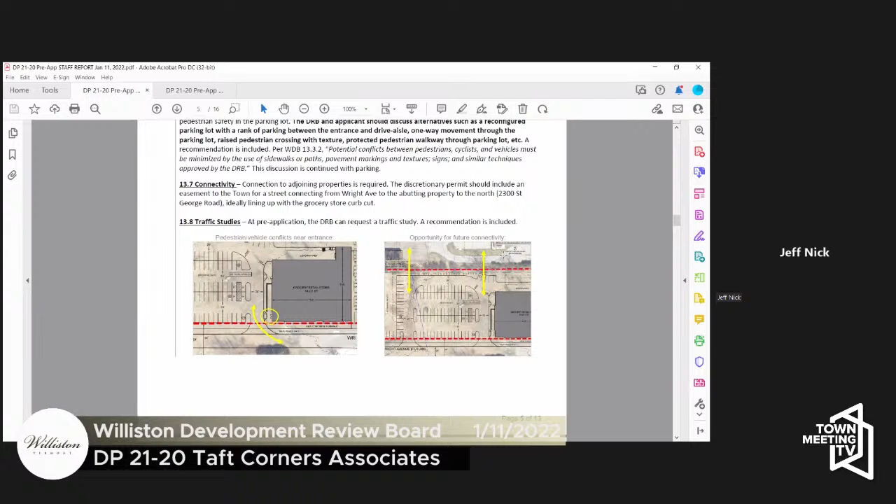Yeah, it's weird because of the garage access. So I don't know if that would meet the intent here. Is the intent to provide additional access points for the dealer lot or for the subject parcel? Both. The intent here is to create an interconnected grid of streets.

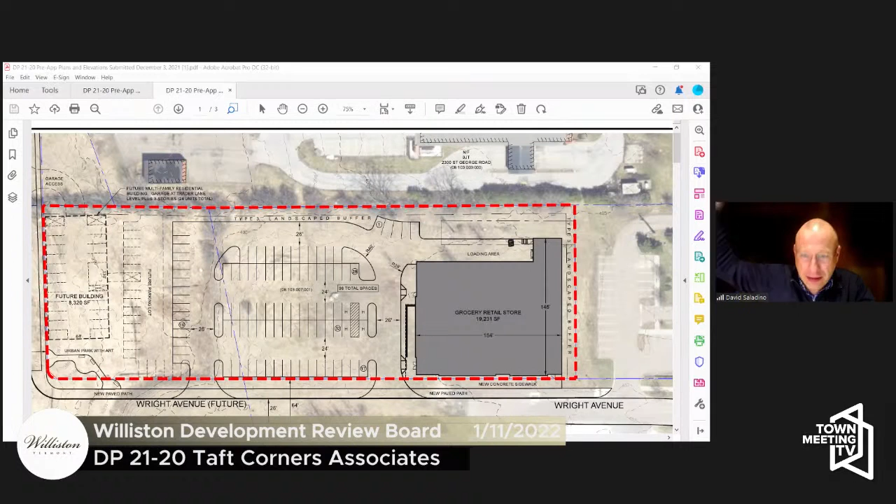To avoid that frustrating trip where you go to the grocery store, then you go to the bank, and you have to go all the way out onto 2A to get to the bank, right? Right. Just to allow those.

I guess what I'm envisioning here on this site plan, with the recommendations about parking lot circulation, is if where this access drive is currently proposed becomes a rank of parking and this access gets shifted down, then you no longer have a drive aisle right in front of the building where all the people are going to walk. If that ever connects through to the dealer policy property, it would function like a secondary street.

And then reorienting the parking to provide better pedestrian flow through. I think it would be feasible to have that access point available in the future where dealer policy then connects through, and this parking lot drive aisle in the future becomes a grid street.

But these connections wouldn't necessarily need to be streets. They can simply be connections between parking lots, right? Right, they could be connections through parking lots, and you'd provide the offer to the town for that right of way. But it doesn't need to be constructed today, just that the safe legal access is there to create that connection between these two abutting properties.

I guess that's what I'm wondering, though. I think you're suggesting that there needs to be an offer to the town for a public right-of-way and a public street connection. I'm wondering, does there simply need to be, sort of as South Burlington does it, you build your parking lot to the property line.

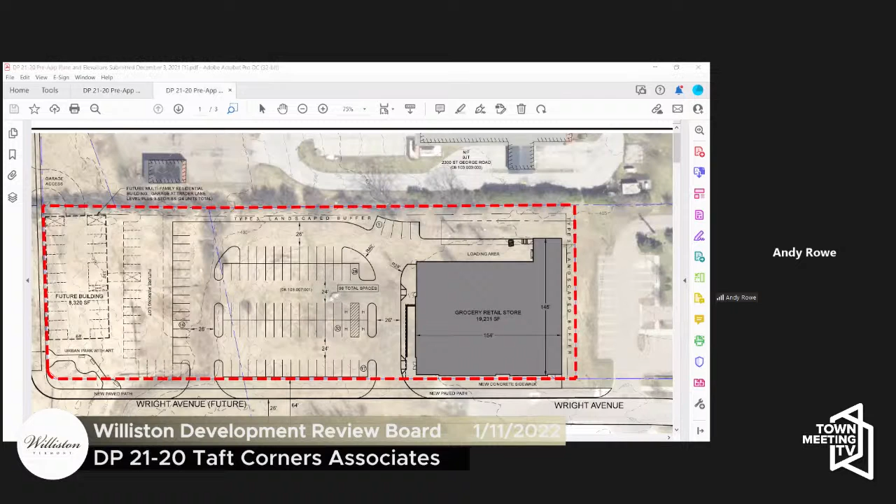When the other guy gets around to it, he builds his parking lot to the property line and there's connectivity, not a defined street, or certainly a right-of-way to the town. Yeah, right of way. I think that would work because 13.7 does say shared parking as well, shared points of access, interconnected streets. So I think that model could work as well.

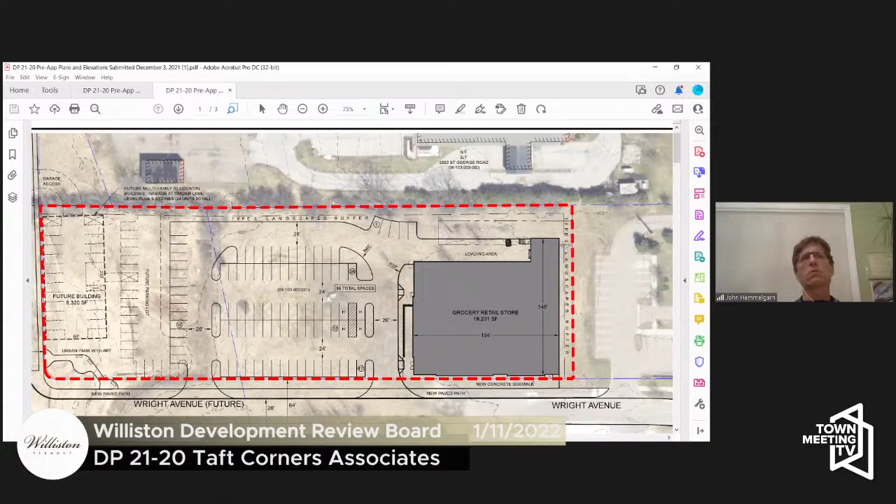I mean, in that case, then anywhere along that northern—is that north on the top, or is that actually east? Yeah, the top is the north. It's the north, okay. So anywhere along there, you could potentially put a connection through in the future, if there was something to connect to.

My understanding when writing the staff report was that the bank and the future grocery store were separate parcels. So I think there's an opportunity as well, if it is a land lease, where that access point is associated with the bank parking lot. It doesn't necessarily need to be to the west of the grocery store. It could be to the east, near the bank.

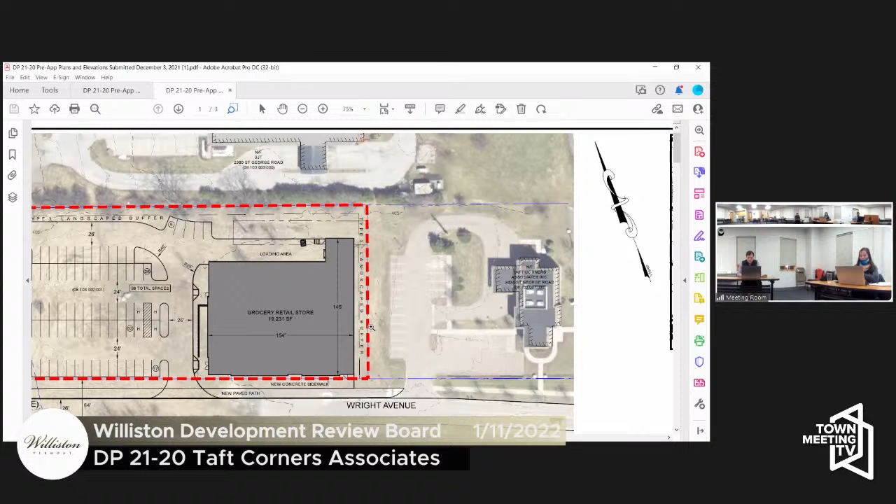So I think there's a couple options if it is still one contiguous property under the same ownership that's being reviewed tonight. So Emily, if this is a definite requirement, the option would be—because it's hard to go to the bank, they've got that ground lease. It would be hard to tell them to share their parking lot with somebody, but with the supermarket, it's a new project.

You could create that easement on the western end of that parking lot. Seems like a logical place, maybe furthest from the supermarket. Yeah, somewhere there. There's a couple options here, whether it's given to the town or the shared parking between two abutting properties to provide that interconnected vehicular and pedestrian flow.

So, Emily, is that something that we would want to see built right now—a little hammerhead or something that went back to the property line—so that the next time the property to the north comes up for approval for something, we can require them to connect to that, instead of still having a gap on this plot because it's not up for approval right now?

It could be built to the property line. I think shown on the plat is acceptable as well. You think about large subdivision design where they're platting that easement or right of way to the property line.

Right, I'm just trying to think of compelling someone to actually build it. I mean, when would we be able to do that in the future if it's not built now as part of this project? That's a good point.

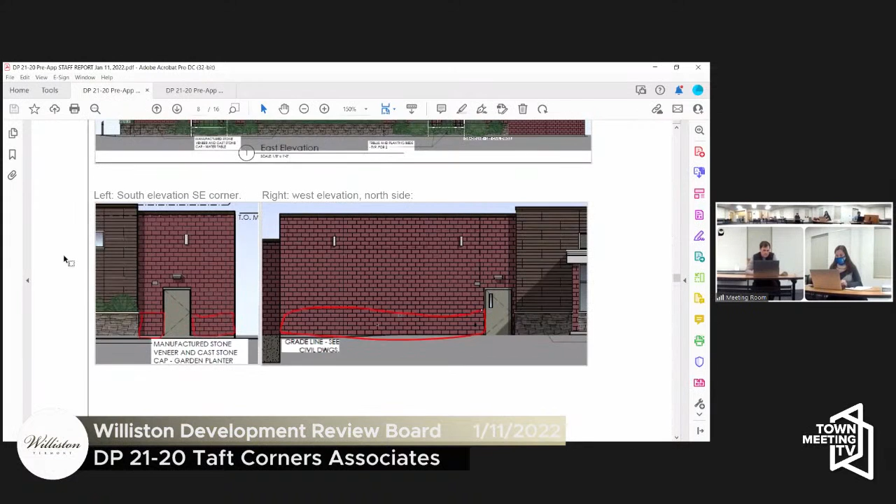Primarily, the HDC was concerned that there are two languages on the building. In some places the stone base is shown beneath the brown veneer, and they're fine with that. But where it's shown below the brick in places where it's not, particularly the southeast corner facing Wright Ave, there would be stone veneer below the brown, then all brick. And on the east elevation, you would have that stone veneer below brick.

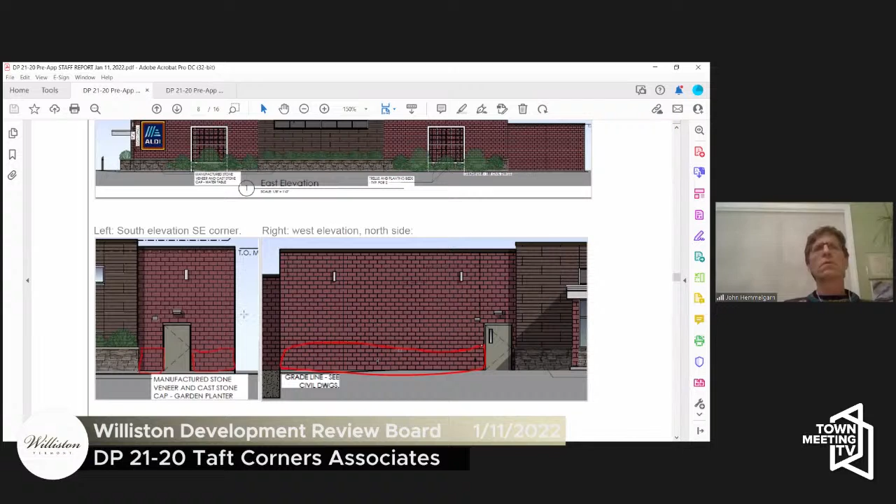So there's a spot where it would be disjointed between the south and the east facades. Yeah, so the HDC is saying either provide stone veneer along all of the brick, or take away the stone veneer on the east side below the brick.

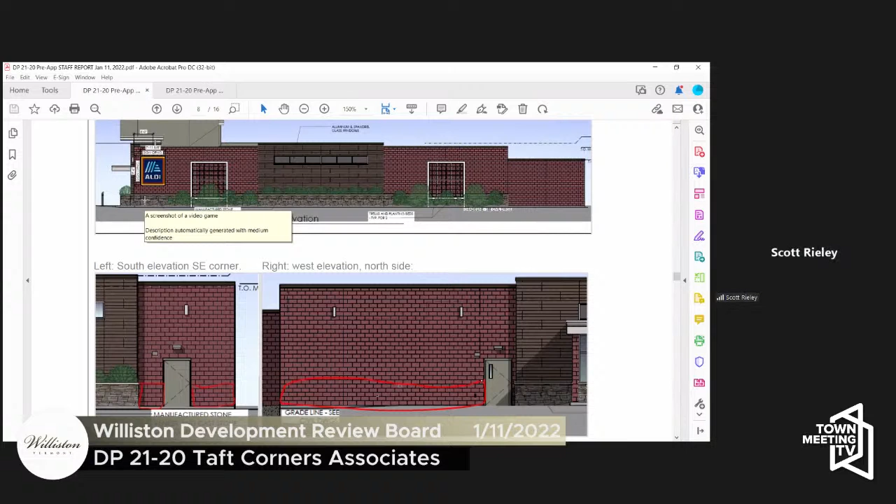Just match the three sides to balance the building. So right, that's the hack's opinion of balance or symmetry, as opposed to the design architect's.

Anybody have any more questions? Do we want to discuss this during deliberations? Anybody else, does everybody understand what's at play here? Doesn't matter to me either way.

So Emily, where do I find the rest of the hack comments that we may want to discuss, or their recommendations? Recommendations number 4, starting on page 11.

So they're talking about requiring building materials and specifications, 3D renderings from Wright Avenue. Okay, that seems reasonable. Forms should follow function. Windows on the west elevation above the canopy should either be real windows or not windows.

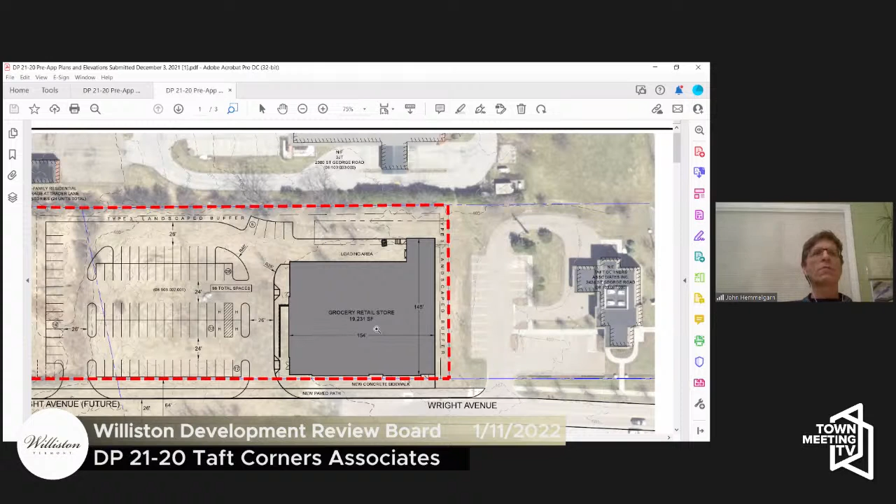I mean, I look at this and I wonder whether it makes more sense to provide those islands at the west end of the site, a path there from those parking spots, if you didn't feel comfortable walking through the drive aisles to get down to the sidewalk.

But anyway, I think the way the HAAC recommendations are worded here is that it gives the applicant some flexibility in how they provide that pathway, how they reduce those vehicle pedestrian conflicts. I think that's a great way of putting this, is that the DRB would like to see how those conflicts have been minimized.

I mean, I take exception to a couple of these. I wonder why the HAAC is telling the applicant here that the size of the overhangs on the building and whether they need to be symmetrical or not.

But if the applicant has no objections, then I'm not going to adjust those. John, as always, it is advisory, not compulsory. Yes, well, we'll talk about what we want to say then in deliberation.

Frank Lloyd Wright would not build a building with the Williston HAAC around. It wouldn't be the same building.

I think we would like to stick as closely as possible to what Aldi's has proposed for the building. In terms of the angles they've put on the roof line, certainly we're willing to hide the mechanical equipment - that should go without saying - but in terms of the other angles and overhangs, they'd like to stick as closely as possible to what they've shown. We're happy to add the overhang above the e-commerce store that faces west. That's agreeable, certainly. Right, okay, all right.

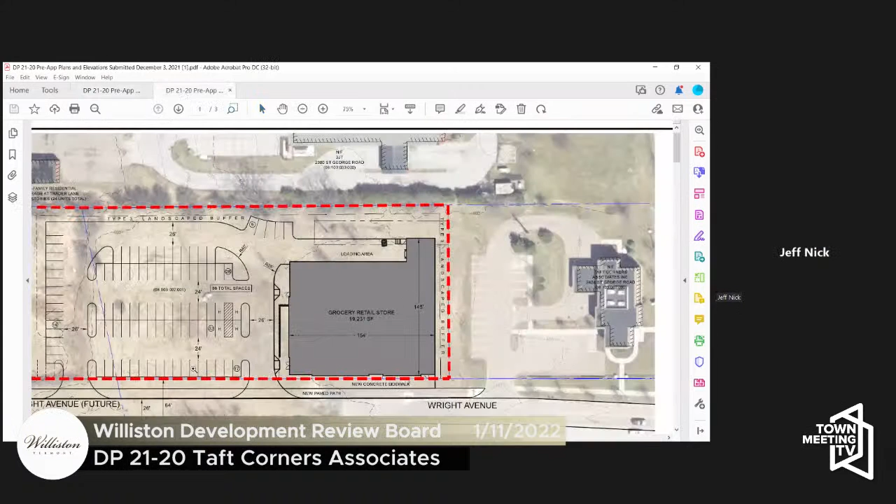I mean, it's certainly possible. It might get in the way of building the future building if we're right up against it - it may even tie into the future building. But we'll take a look at it, if that's what you come back with.

Well, the other issue is the urban park with art is not fully defined until the other building's built. I mean, that could just basically be a couple of benches and a sculpture stuffed in the dirt, and that would qualify until they build the other building and put the finished product in.

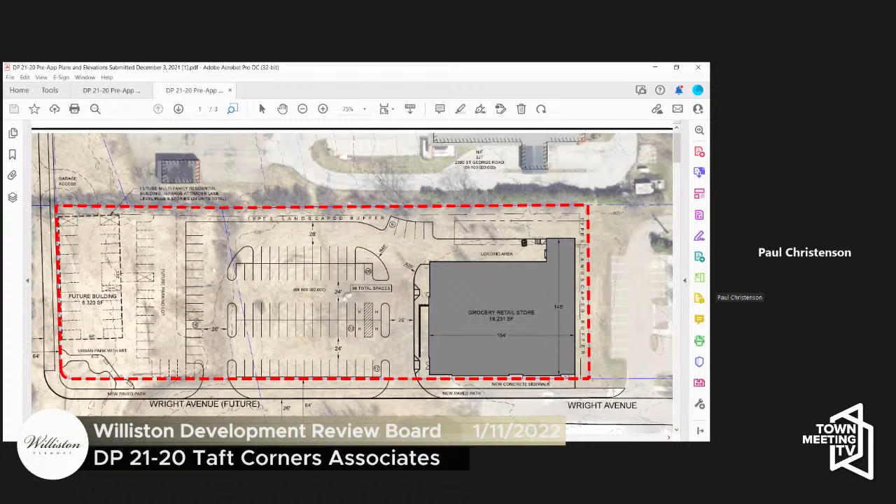Possibly. I mean, I can speak for myself here that I'm hoping to see at DP for the grocery store a good faith effort - that you're moving ahead with the rest of the project with all due speed, and that as approvals are available and you're able to do it, that you would be doing that in a timely fashion. Absolutely.

No, and actually we've already been approached by an apartment developer that wanted to buy it from us. So, right, there's no reason - and with what Matt was saying earlier about what would be involved with looking at this at a DP level, I think that certainly would demonstrate your seriousness about moving ahead with this as soon as you can.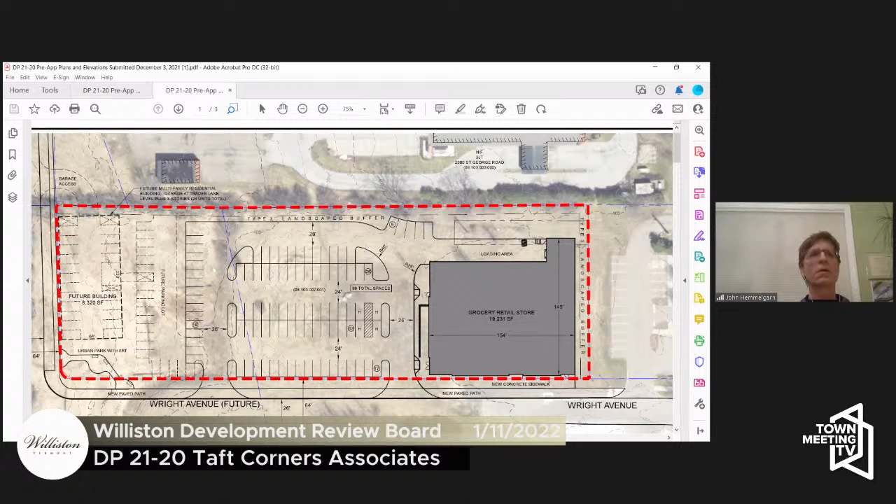In my mind, from kind of a common sense standpoint, that seems to make a lot of sense based on the conversations we've had here tonight. Yeah, understood. Obviously the board will be discussing this as we move forward here, later into the night. We'll try to write it down here in a way that you can understand what we're looking for.

Anything else on the 5 of 9? We've vested rights, non-conforming lots, et cetera - I think we exhausted that one pretty good, huh? Growth management, we talked about that. Bicycles and pedestrian access.

We talked about how you might be able to adjust the parking lot to better comply with the intentions of the bylaw. I guess staff was suggesting that a rank of parking be placed up against the building. That's an issue, I think, for the tenant. I think the applicants talked about restricting...

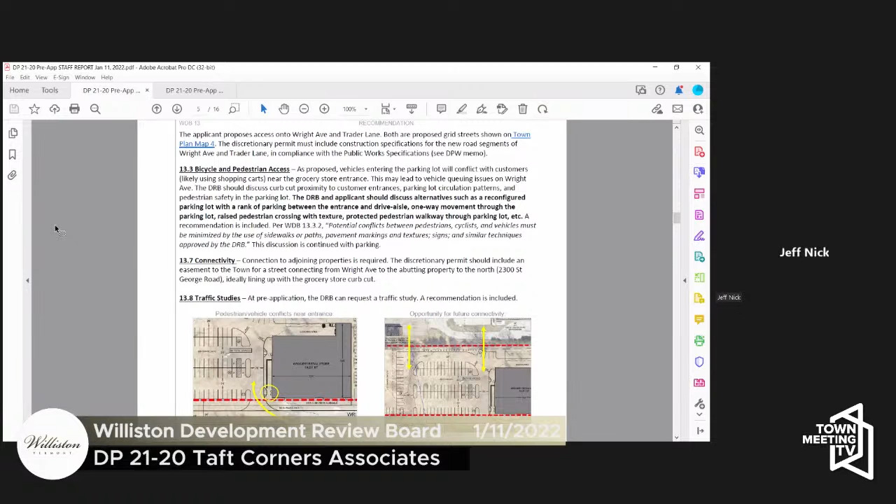...the easterly curb cut to be enter only, or potentially exit only. Works much better being an entrance only for deliveries. I guess we'd be looking for some feedback from the DRB if there's a strong preference one way or the other. We've also talked about some aisle and angled parking scenarios as well. Yeah, definitely the supermarket would prefer not to have a bank of parking against the building. But as Andy said, entrance only - they're willing to think about that one.

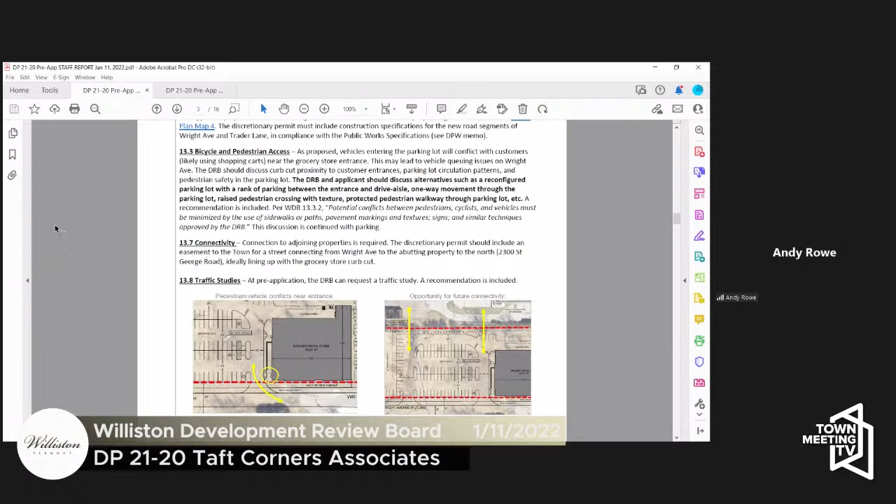I think, while the landowner has been talking with the town, I'm not sure what the build-out for Trader Lane would be. Obviously, Trader Lane would open up more opportunities for the distribution of trips from this site, but it would also bring a lot of background traffic with it. It seems like we would probably need to look at this with just access via Merchants Row and Wright Avenue initially, unless the board thinks otherwise.

That feels reasonable to me. All right, so as I preview the rest of the items here, it looks like very standard stuff. I don't see anything we need to belabor too long, unless somebody has a question or a comment to make on the rest of the staff report.

So I guess I will open it up now to anybody in the audience that has a question of the applicant here, or has a comment to make. If Pete says to raise your Zoom hand... No chats and no raised hands. No chats, no raised hands.

So board members, any other questions here that we haven't taken care of? None for me, Jeff, John. Jeff, Andy, anything out there from you guys? Any last comments? No, I think we're good.

I think I'll probably follow up with staff and talk about some of the issues we discussed earlier, in terms of the phasing and how we accomplish all of that.

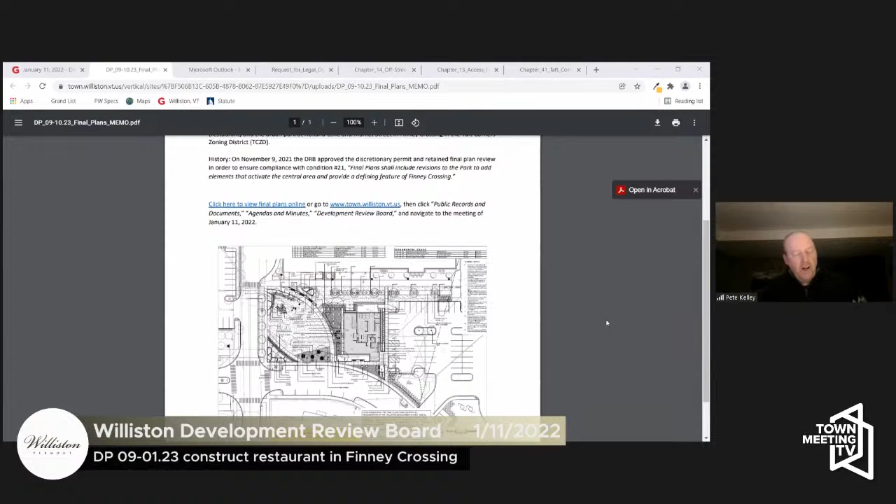So I would like staff to take control of this, please. I did not have drawings in my packet. The DRB retained final plan approval, so walk us through what has been proposed, so that when we go into deliberations, we can have a discussion about it.

The DRB retained final plan review primarily because of the discussion about the urban park and condition number 21: final plan shall include revisions to the park to add elements that activate the central area and provide a defining feature of Finney Crossing.

What the applicant is proposing is to split final plans into two and do two separate permits, one for the restaurant, one for the urban park. We are recommending that you approve the final plans for the restaurant as submitted. We uploaded and linked them online. Staff has reviewed them and finds the building and its appurtenances, the landscaping along the walkway, the parking, and the landscaping along Holland Lane all in compliance with the DRB's conditions of approval.

At a later date, they'll come in and submit final plans for the urban park, including the element for the activated central area, and that will be a more detailed discussion for the DRB. What we're asking tonight is that you make a vote for staff to approve the final plans as submitted.

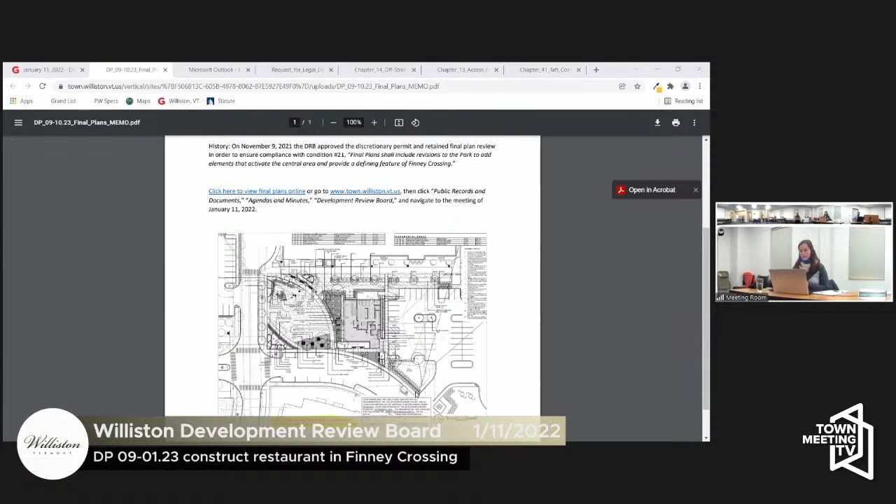Okay, for the restaurant, let's do that. Let's do that right now. So is there a motion to approve the restaurant final plans as submitted?

I'll make a motion to approve the final plans as submitted for the restaurant. Second. Okay, is there any discussion? No, David, did you have something you were gonna say?

I did, yeah. Can you explain how this is different than the application we were just talking about, where we're gonna approve this restaurant, they can build it. How do we have assurances that they're gonna come and build the park?

Right, so the development agreement will need to include all the required improvements that were part of the discretionary permit application. The senior living building still needs to finish its permitting final plans process, and I believe there's one more building in Finney Crossing Building A that can go through. So the same way that throughout Finney Crossing's permitting history, it's been anticipated that this urban park would happen, other buildings were getting their permits and certificate of compliance.

It's going to come down to those final few buildings, that the urban park will need to be built before Finney Crossing gets its final certificate of compliance. So we still have some leverage to use, I guess, is what. Right, we still have some leverage, and we're aware that the applicant is working on those urban park design elements.